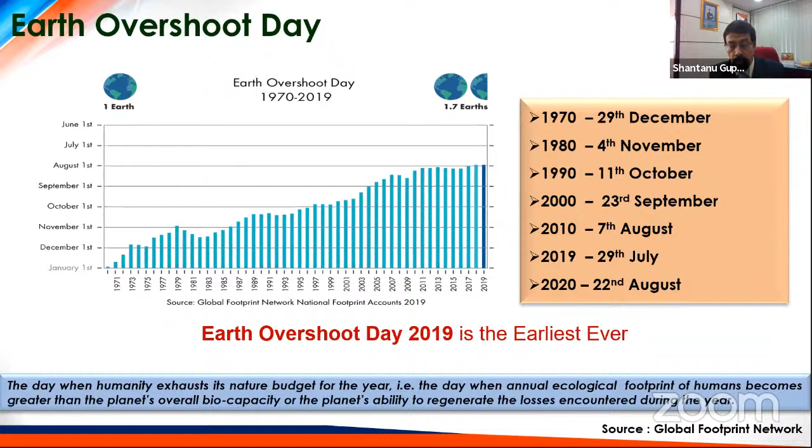Let's see what are the objectives and strategies we are following to make this happen. The first thing is carbon footprint management — it's very essential to manage carbon footprint. How are you doing it? First accounting, then energy conservation techniques, then energy efficiency — you have to look at efficient gadgets. Then coming to alternative energies, biofuel, and carbon sequestration. These three alternatives are very important in today's context in the world.

Globally, these things are being followed. Indian Oil started this 20 years back, and still they are in the front line so far as oil companies in the country are concerned. So that is where the strength of Indian Oil is.

Water footprint management: we have worked out reduce, reuse, recycle. These three basic things we are working on, in addition to rainwater harvesting, which is being done at the location level. This is very important. I urge each of you to be very focused on the maintenance of rainwater harvesting equipment and facilities provided across the country. This is where our future depends.

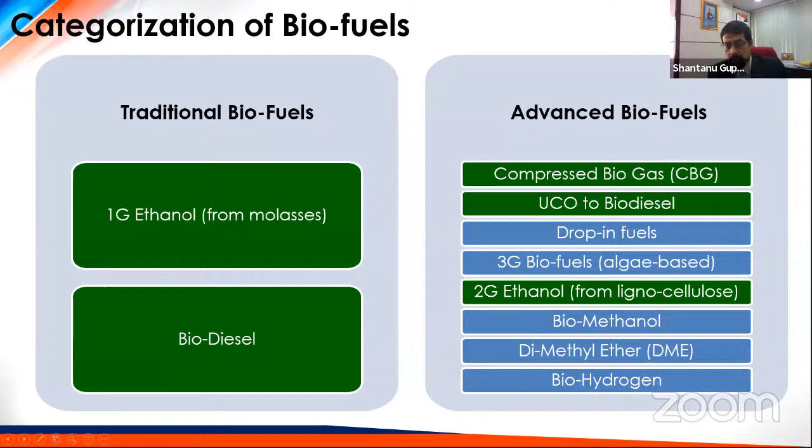And this cascade goes for transportation. This is where the whole chain of biogas, starting from the waste, becomes a wealth because you are selling it at a price equivalent to CNG. This biogas, CBG, is equivalent to CNG. No vehicle changes are required. Any CNG vehicle can consume CBG as automotive fuel.

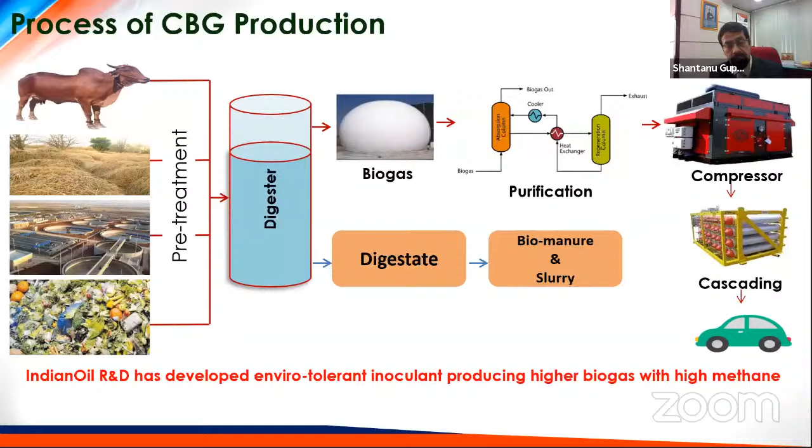Indian Oil is very actively working on this. Our R&D center has developed an enviro-tolerant inoculant producing higher biogas with high methane. Generally, biogas is 50 to 60% purity initially when raw biogas is produced. But if you use this inoculum developed by us, it will increase by 20%, meaning you will get over 60 to 70% biogas initially. So it becomes very, very cost effective.

So the Satat scheme has been designed for this, which was launched on 1st October 2018, which is Sustainable Alternative Towards Affordable Transportation, targeting 5,000 such CBG plants of moderate size. 15 million metric tons of CBG will be produced per year as a whole, and 50 million metric tons of biomanure will be produced per year as a whole.

If you see 15 million metric tons, which will take at least 15% of your gas share, it's an enormous savings not only from the import perspective but also from the environmental perspective. Otherwise, this waste either would have been burnt, thrown into water, gone to drains, or gone as stinking waste all across the country.

So this is a very, very ambitious project. CBG plants will be set up by entrepreneurs. The model is we'll be giving EOIs and then LOI will be issued to the entrepreneurs, and we'll take the offtake guarantees, which is 10 years. Now we are making it 15 years, the guarantee of offtake.

The procurement price has been fixed at 46 rupees per kg plus taxes, which is GST at 5%. This is up to March 2024. After that, for another 5 years, it will become a floor price, so it will not go below 46. It will only increase depending on the time and market condition.

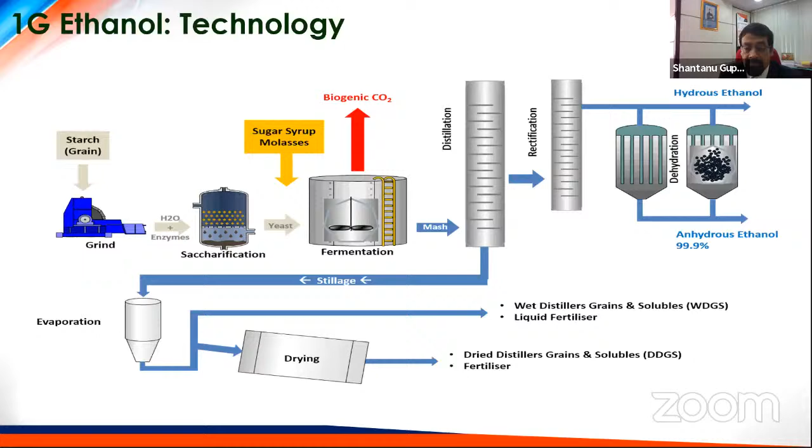By December 2023, we will be coming up with the first plant, which will be in Chhattisgarh, which will produce ethanol and supply for blending. So our production will blend, and that will be another advantage as far as cost is concerned.

And this year it is going very steadily because we have got good offers from sugar industries and damaged food grain suppliers. So we are targeting around 8%, 7.8% plus will be the average blending. This is how the calculation is done.

We do 10% blending wherever ethanol is available, and nil blending where ethanol is not available. We don't do intermediate blending - 2%, 5%, 7%, no. So if you see the total ethanol procured by the country divided by the total MS sold, this is the figure - an average across the country.

And now coming to 2G, second generation ethanol, we are almost 50% progress made. There is a plant coming up in Panipat, which will convert biomass.

This is the top photo - you can see rice straw, wheat straw, sugarcane bagasse, cotton stalk, corn, sugarcane trash. All these things can be converted through this process of technology, and then hydrolysis. Through the hydrolysis process, we get glucose, xylose, and lignin, and then bioethanol is produced.

And this lignin cannot be converted to ethanol. It is used as fuel for the boilers. The lignin also has some valorization techniques which are being worked out.

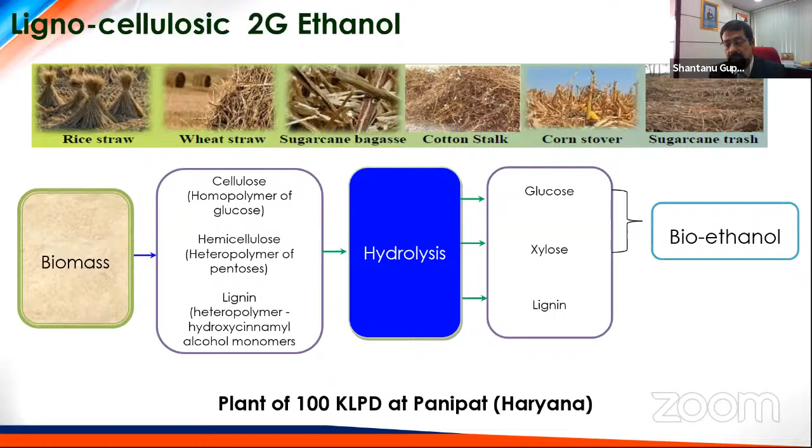So this is 100 KL per day, in Panipat, Haryana - this plant is coming up. We are also expecting by next March 2023 this will come to full production.

3G ethanol is also an area we have touched. We have been working with a company called LanzaTech in the Panipat refinery. Refinery tail gas, which is being taken out, is converted to ethanol through gas fermentation technology. This is one of the latest technologies in the world. Otherwise these gases are being flared, but now they will be used for manufacturing ethanol, and this technology is already working.

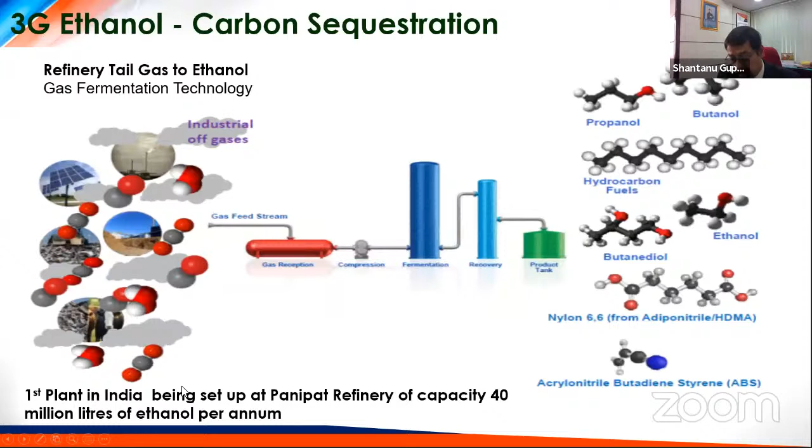We are going to produce 40 million liters of ethanol per annum in the Panipat refinery alone. This is the first plant coming up. After its success, we'll scale it up with other refinery models also.

Coming to biodiesel, there is a challenge. We are a diesel economy, so diesel consumption in our country is maximum, almost 3.5 times our petrol consumption.

For diesel, various efforts are being taken, but one major area is used cooking oil. This is edible oil used by bulk oil users like Haldiram, Bhujiyawala, McDonald's, KFC, restaurants, big hotels, and canteens. After frying, it's a question of awareness—people keep frying the oil, and after 2 to 3 fryings, this oil becomes unsuitable for human consumption, but we hardly bother to throw it away.

Efforts are being taken in consultation with FSSAI. We have made a move—there is a state level committee where the food commissioner and FSSAI in-charge will be present. We will collect this used oil from restaurants, bulk oil users, hotels, and canteens. For now, we are not touching household consumption, because we have a mindset to consume everything and not throw oil out, which is why we become a diabetic and hypertensive population across the country.

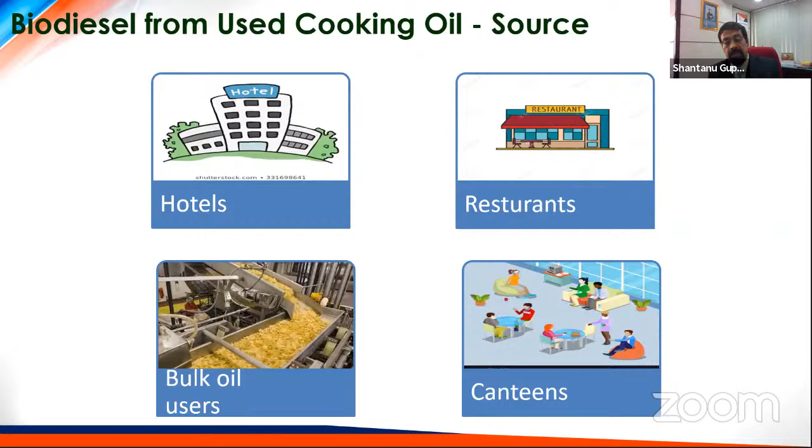So after the second or third frying, the oil will be taken out and given to biodiesel manufacturers, who will convert it to biodiesel. That biodiesel will then come to our terminals and depots to be blended with diesel.

This is the process flow we have defined. To collect it and develop this infrastructure, we have also published an expression of interest, and good responses are coming for that. For your information, around 2200 TKL of used cooking oil is generally used, and 220 crore liters of biodiesel can be converted from used cooking oil.

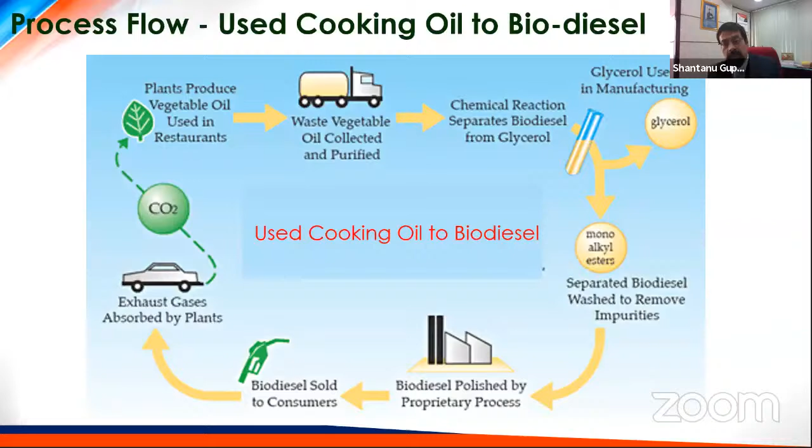Collection and aggregation challenges are there, but these are being taken care of through the state level committees. In maybe another couple of years, we will have a full-fledged infrastructure ready, with satellite plants nearer to the cities where maximum frying happens, and that will be converted to biodiesel. It's a win-win situation—it takes care of citizens' health and also takes care of our diesel requirement.

This is one outline of how we are selecting vendors. EOI for 300 cities is continuing now across the country, and we have already issued sufficient letters of intent. 28 crore equivalent biodiesel production capacity is already in the process of addition. Once that is added, we are targeting around 250 to 300 crore liters of biodiesel production. This movement is going on along with compressed biogas.

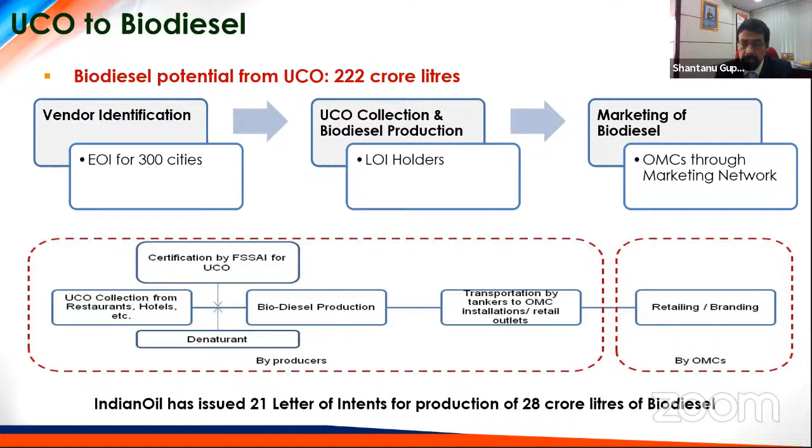This is another area of waste to wealth, which was totally untouched for fuel production. Generally waste is converted to power for electricity generation. Municipal solid waste, which is thrown from every house every day, amounts to 62 million metric tons per annum generated in our country.

You can see the huge Gazipur dump, and dumps across Okhla and other major and minor cities, where you have to guard yourself and close your nose due to the stinking smell. This is not only a health hazard but also a hazard for the climate, releasing obnoxious gases into the atmosphere. Out of 62 million metric tons, 90% is collected but only 27% is treated, so the rest goes to the landfill. If you can't treat it, you dump it 10 to 20 kilometers away from the city.

Keep on dumping, but how long will you be able to dump this much quantity? After some time, you will be fully covered. I'm giving an example, it will be an unbelievable number. In Delhi city, they generate 14,000 tons per day of municipal solid waste. Can you believe it? And these are partly being processed, partly being dumped. If this dumping continues, over a period of 10 years, Delhi will have no space. We'll only have dumps surrounding us.

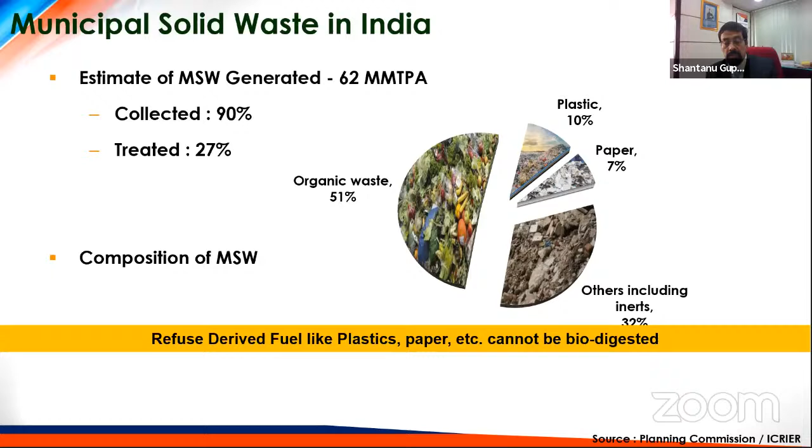There is also a good intervention of the latest technologies we are working on, called refuse derived fuel. It consists of plastic, paper, and material which cannot be biodigested and will remain solid. That can be converted to energy.

The process we are working on, a demo plant in Okhla in Delhi, is with a USA-based party who has developed a system that will produce syngas, synthesis gas, through a gasifier using a plasma torch. All sorts of biomass can be processed here.

After the gasifier, syngas is produced. Syngas is nothing but a combination of carbon monoxide and hydrogen, and these two elemental gases will be conditioned. With downstream technology, we can use it to generate power. We can use it for hydrogen separation, giving us hydrogen for the future. We have a synthesis process through which we can process chemicals. We can have a future FT process through which we can get liquid fuels like ethanol, methanol, and others. So this is where we are going, and synthetic natural gas is one more alternative.

For the demo plant, we are producing electricity because we want to see the syngas quality and generation, how much it costs, so that we can go for a scale up. We are very hopeful. By the turn of this year, we expect to see results on how this syngas is being produced. This is the first of its kind happening at this capacity in the country, by Indian Oil.

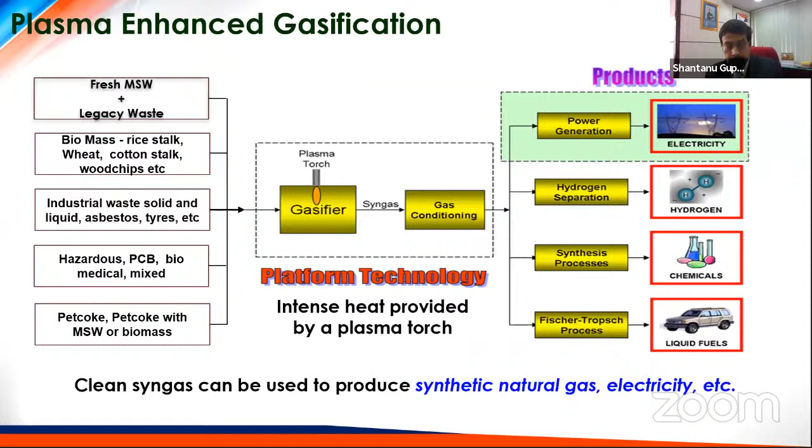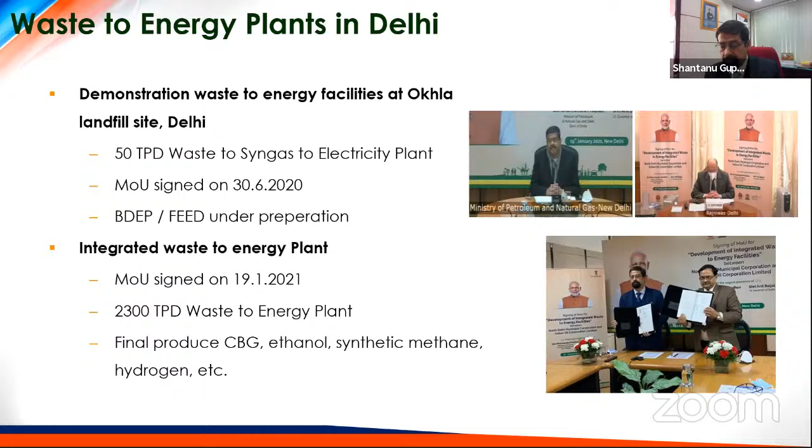Very recently, some of you must have watched this video because we had signed one MOU for a demonstration energy facility in Okhla. Also, another is an integrated waste to energy plant, recently signed on 19 January under the chairmanship of the Honorable Minister of Petroleum, where we'll process 2,300 tons per day of waste and develop a plant producing biogas, ethanol, synthetic methane, hydrogen, and other outputs through a combination of different technologies. In the picture, you can see the Honorable Minister, the Honorable Lieutenant Governor of Delhi, and at the bottom myself and the Director of NDMC exchanging the MOU documents.

There is one opportunity we are working on: plastic recycling. India's plastic consumption is 14 million metric tons per annum, and the growth rate is 5.15%. After 10 years it will be at least 1.5 times that, reaching 21 million metric tons, and it will grow further due to consumption levels. Projected plastic consumption this year, by 2021, is almost 16.45 million metric tons. Per capita plastic use in India is 11 kg, compared to a global average of 28 kg, meaning we are still much below the global average, so we ought to grow.

Current plastic waste collected for recycling is 10 million metric tons per annum, with an uncollected portion also existing. Waste from the packaging industry is 43%, mostly single-use in nature. This is the plastic scenario. What is happening to the plastic? We just throw it, that's all. But then what? Then this.

We are going for a plastic neutrality ecosystem from a sustainability point of view, because as we push sustainability hard, we saw there is an opportunity. So what we are trying to do is take the waste generated plastic, segregated plastics from offices, households, manufacturing, and all those sources, to the recycler.

We are trying to develop a recycling team which will segregate all the processed material and pelletize it. Then there will be compounding with patenting from OEMs and applications, and then the polymer is processed and converted to application. Plastic processors and OEMs will be processing that. We are working on this technology with an Italian firm.

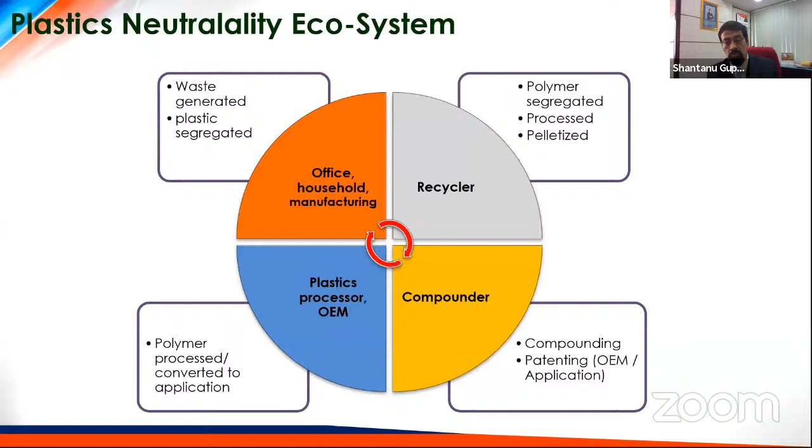At Dahej, we are trying to get one of the first commercial demo plants. It will not be a full-fledged high capacity commercial plant, but we are trying to see around 100-150 tons per day, how things work, and then we'll scale it up. There's a tremendous business opportunity in this area which will address your waste mitigation and also give you sustainability from the very beginning.

Auto solarization is going in a very big way - 70,500 autos are solarized till December 2020, and installed capacity is 97 megawatt. So this year we'll be crossing 100 megawatt, which will be a very good push from all sides. Through this we have mitigated CO2 - 329,000 metric tons of CO2 equivalent mitigated in 19-20. This is very important because it's a key sustainability target which ranks us highly placed across the globe, being an oil company pushing so much alternative energy and taking away carbon mitigation.

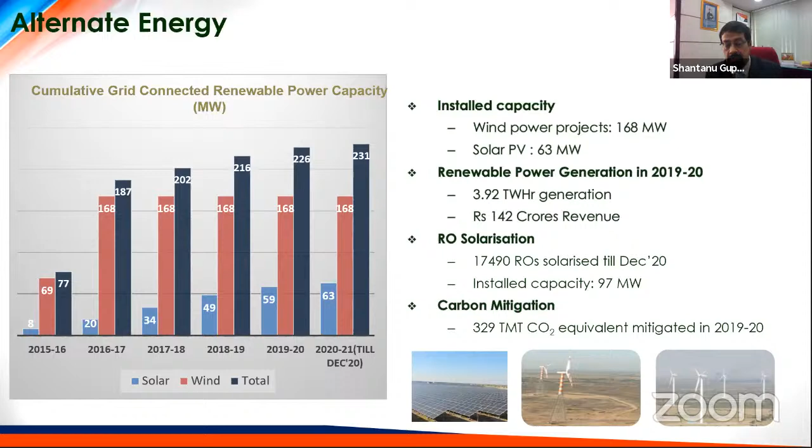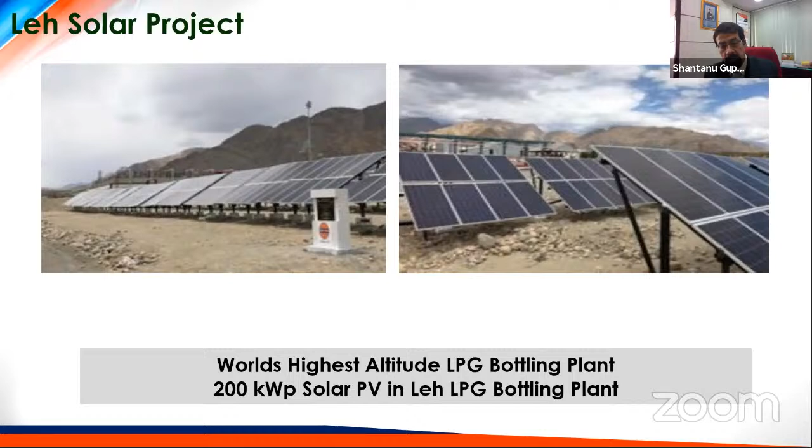This is for your information - you may feel proud to be part of this organization, where you have the world's highest altitude LPG bottling plant, which is fueled with 200 kilowatt peak solar power, in the Leh LPG bottling plant. Here you can see Leh, where the solar intensity is very high, and we are proud to be operating this plant at the highest altitude in the world.

Coming to electric mobility, we have a set business plan. We have aluminum air battery interactions, we are making a JV, we are with OEMs, we are in lithium ion also, and we are in sodium. So all sorts of battery manufacturing and swapping we have touched upon.

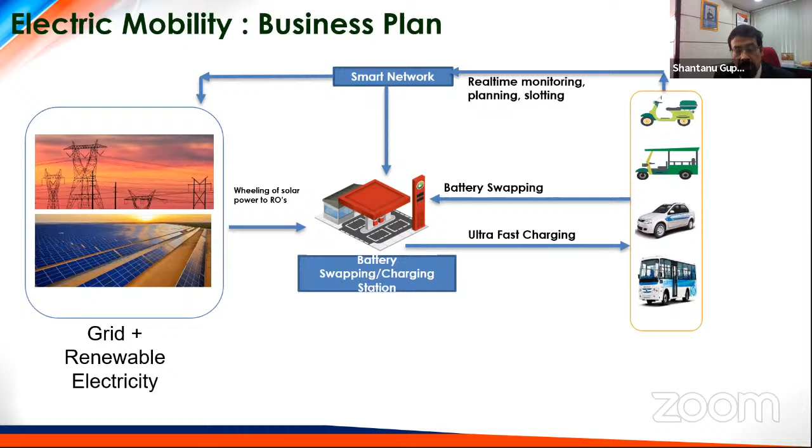So coming to the almost we have reached the end. So what are we doing? Internally, it's balancing the triple bottom lines of sustainability, that is economic, environment, and social. This is the challenge of balancing. This is what continuously we're trying to do.

Internally, Indian Oil has undertaken measures including energy efficiency, renewable energy, carbon sequestration, water management, and waste to energy. And waste to energy is going to give the pathway for the future. For effective utilization of waste and biomass, Indian Oil is setting up biofuels projects because we believe biomass is the new crude for the future. You need not travel across the globe to bring crude with a huge transit cost. You have crude with you, which is the biomass and waste. So these are areas where you have to tap today so that your future inputs for production is assured. Before anybody steps in, we will grab all this biomass available and book it for ourselves. And this is renewable—every year you will be getting that.